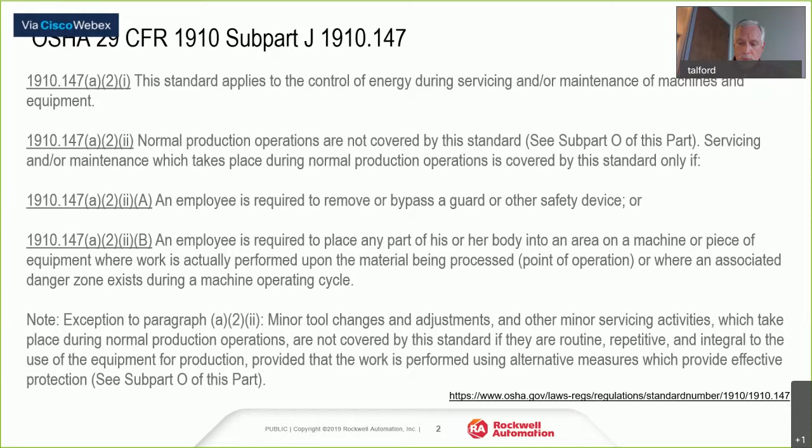But there's a couple of things that are important I want to emphasize here, and one is that this doesn't cover normal production operations. You see there; those are covered by Subpart O. And at the end, there is an exception, note exception paragraph A2 II, that talks about minor tool changes and adjustments. So we'll be digging a little bit deeper into this.

In summary, one thing we want to be very clear about that can get lost in these discussions about the minor or alternative method of protection is that lockout tagout is the default position for servicing and maintenance. Okay, that's it. And personally, I had that driven home by an OSHA field representative, retired several years ago, who was a great mentor. I could sense he sometimes got frustrated with me when I was talking about light curtains and laser scanners and all this stuff. And finally one day he just shut me down.

He said, "Tom, you don't get it. You technologists want to wave your technology wand at everything, and that is not the approach. You've got to earn it." And I'm sitting there, earn it? What do you mean, Jim? He said, "What is the safe state of a machine?" I said, "The safest state is de-energized. But that doesn't do anybody any good." And he goes, "Yeah, that's right. A de-energized machine doesn't have utility, does it?"

I go, "No." And he says, "So what allowance is there?" I'm like, "Okay, Subpart O." And he goes, "That's right, for the point of operation." And he said, start with in mind that the safe state is de-energized, and anything you do, whether it's guarding around the point of operation or minor servicing, make sure you earn it, that you can demonstrate why the approach you're using is necessary, and you can justify it.

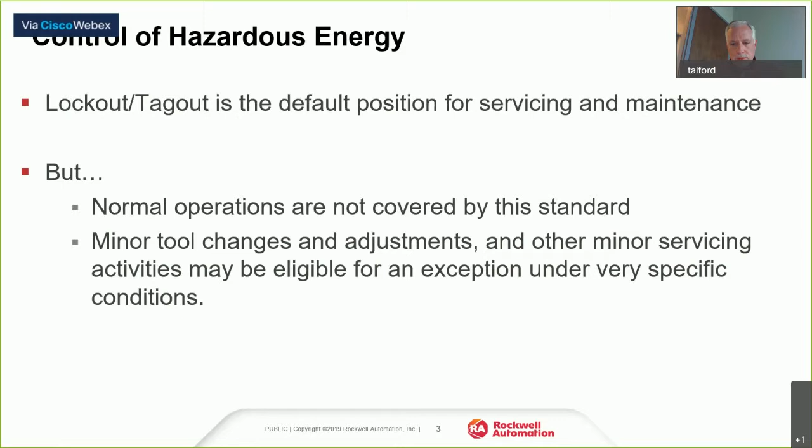So if we dig in a little deeper on the note that I pointed out earlier, you can see that these exceptions for minor servicing have to occur during normal production, be routine, be repetitive, integral to the operation of the machine, and there must be an alternative measure in place that provides effective protection. In order to use the minor servicing exception, as we often call it, we have to meet all of these requirements.

What I see often with minor servicing, I tend to see folks fall into one of two groups. There's the group that doesn't take advantage of it at all. They're scared to death of it, minor servicing invokes fear, and they avoid it. Then unfortunately there's a large group of others that say, oh, minor servicing, I'm going to claim that, with no thought and consideration to the requirements. This exception is detailed, and there's a lot of supporting guidance around what it takes to meet this.

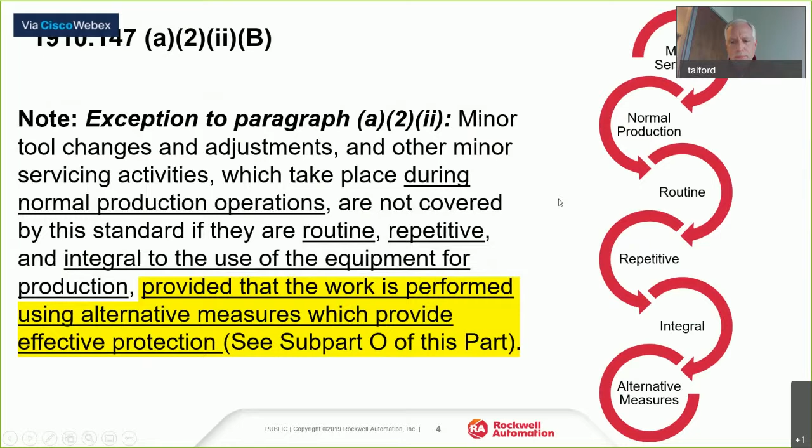So what happens here in minor servicing, we begin to see some overlap of the worlds. There's this case on the left in red where we have lockout tagout, where the machine must be de-energized completely. On the right, we recognize that to perform some tasks, the machine must be energized. There's different criteria. If we're dealing with lockout, tagout, or control of hazardous energy on the left, that's very procedural - you can see the outline of the procedures required. When we get to performing tasks under energy, it's a different realm, and even the note directs us to subpart O.

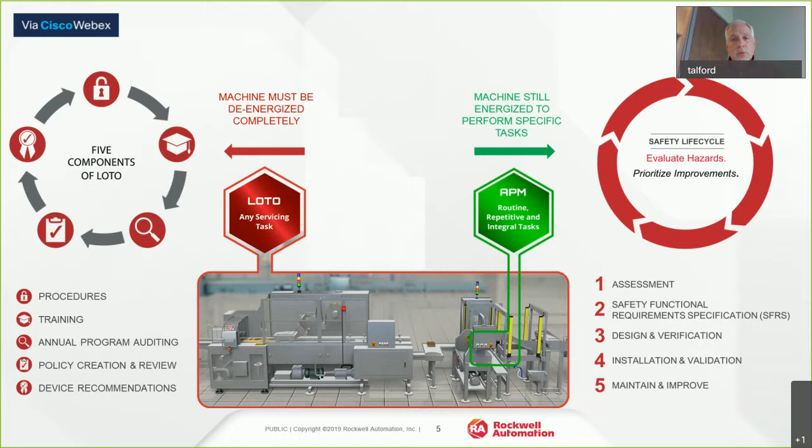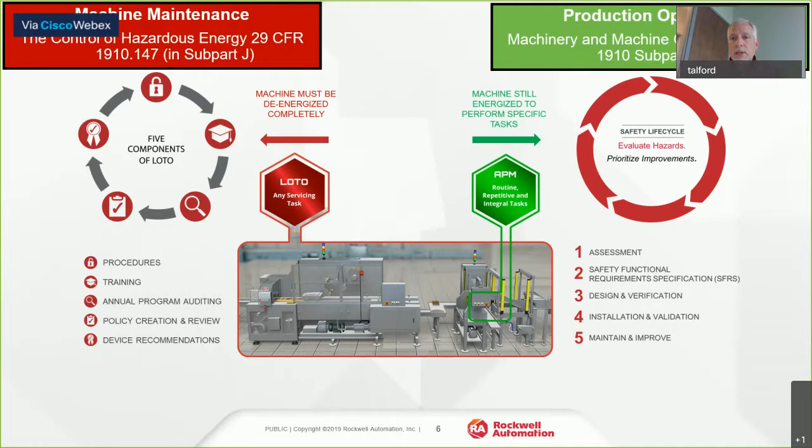So for machine maintenance, that falls under 1910.147, 1910 subpart O for production operation, and then minor servicing bridges and allows for some minor servicing tasks to be performed. But we have to meet criteria, and the key part of that criteria is effective protection. Because quite honestly, if it's routine, repetitive, integral to the operation of the machine, and it's done during normal production, so what if we don't have an effective means of protection?

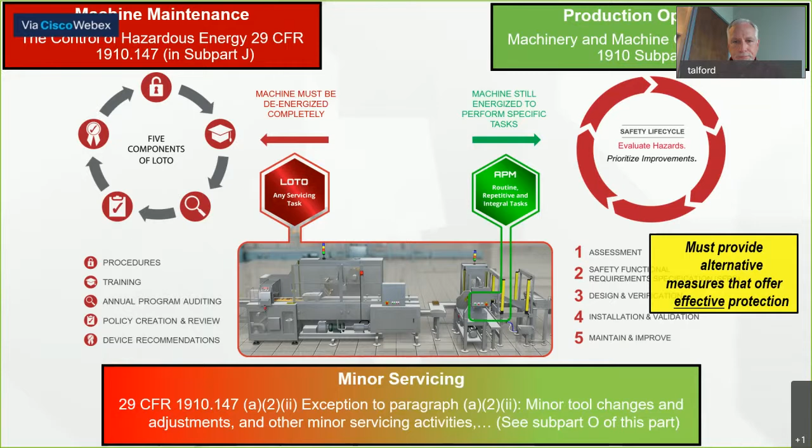This is absolutely the critical piece, and unfortunately the piece that I don't see folks spend enough time looking at. Why do we want to spend time on this? Why is this important? One reason you see commonly is the financial impact. Locking out or tagging out takes time, okay? An alternative measure can reduce that time to perform a task, and that can have significant financial impact. So that's one reason people are concerned.

But other reasons that we want to look at alternative measures is what about other exposures? When I go to a panel and de-energize it, I am introduced to potentially other hazards. So we need to look at the bigger picture. Also, is it potential that the alternative method of protection may actually reduce risk in some area? And we also need to look at the reliability of machinery - what impact is our lockout tagout program having on that? So those are some of the reasons why it's important that we look at this.

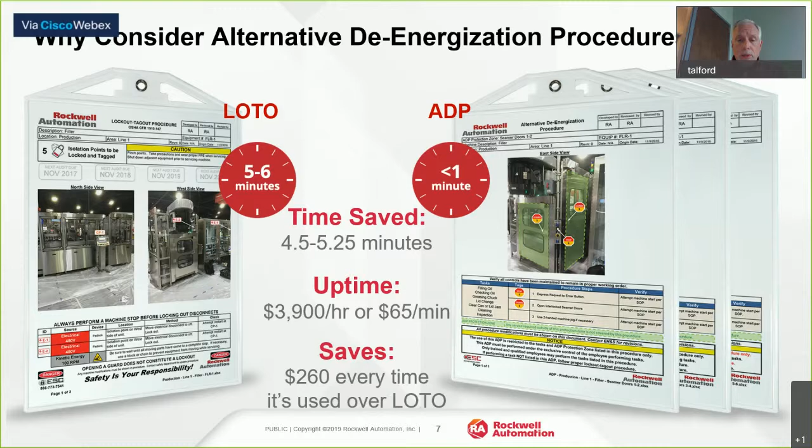Let's clarify, make sure we understand what's the law and what's the standards, because I'll get rattling on and maybe just start spitting out some standards and references. The key thing is federal regulations 29 CFR 1910 - that is the law. That's what we must do. It's a performance standard. It's the law.

There are several industry standards that we will reference, such as ANSI ASSP Z244.1, ANSI B11.0, B11.19. These are industry standards, falling under what's termed consensus standards. They help us with the how, but they're not the law. So if there's ever a conflict between the standard and what you see in 29 CFR 1910, 29 CFR 1910 is the law - it's the top dog, but it doesn't prescribe exactly how we get to this effective protection. That's why these standards become real important. Another type of standard mentioned here are machine specific, or what are called C-level standards.

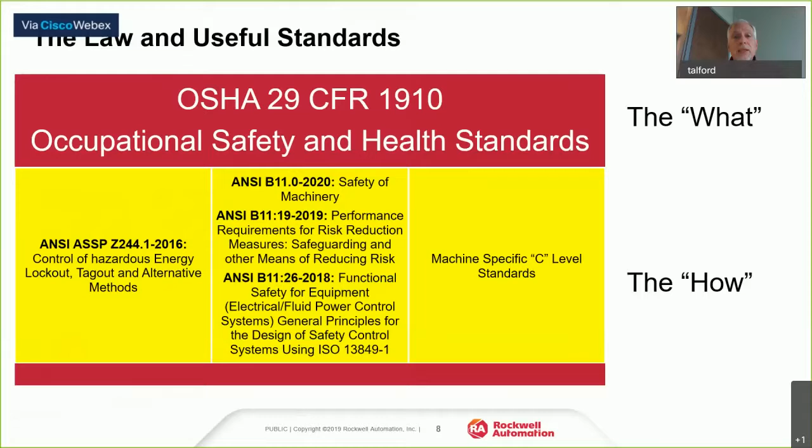So you may find, like for robots, for presses, there are servicing tasks that are well documented in there, how to have an effective alternative means of protection when dealing with that specific kind of machinery. Right?

ANSI Z244.1-2016 really is a great document that I would encourage you, if you're applying or thinking about applying the minor servicing exception, that you invest in getting this document and familiarize yourself with it. It supports everything we're trying to achieve here.

The first 7 sections really focus on the control of hazardous energy and making sure that we're not exposing our workers to any type of unexpected startup, things of that nature, dealing with stored energy. And it states here in 7.1, lockout/tagout shall be used to secure the energy isolating device to control hazardous energy to the machinery, equipment, or process from the energy source. Sorry, I read all that because the key's right here. Lockout shall be the primary method of hazardous energy control.

Okay, that's clear. I said it before. I'll say it again. Sorry, but it's important. We've got to earn it. Think of it that way. I need to justify. I need to demonstrate practicability if I'm going to use the minor servicing.

Now, if we get to alternative methods of hazardous energy control, or what's sometimes referred to as minor servicing, to use those alternative methods, there are 3 criteria that I'm going to point out here. That'll be the basis of most of our time. One, I underlined effective. How do you know if it's effective? Effective means it has to work.

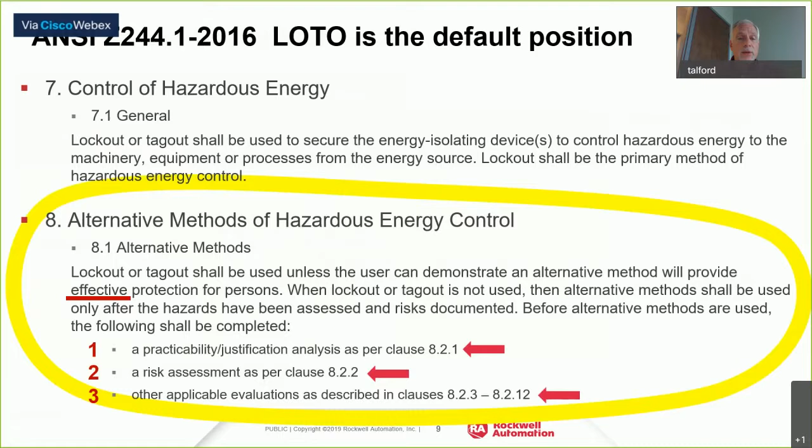There's that guy, man. He's always there when we're talking about guarding and risk management, risk reduction. So the risk assessment, and then we look at the other applicable evaluations that are important for an alternative method. So these are three things. Before I'm going to claim that I have an effective alternative method, I need to make sure that I've looked at all three of these areas. And this standard gives us great guidance for that. So the practicability justification analysis.

I've got them out here. It starts with assess lockout impacts. What are the impacts of locking out? What's the procedure? Are folks exposed potentially to arc flash hazards? Maybe they're not. Maybe the impact is minimal. We need to look at that. We can't justify the use of an alternative method just because the lockout is inconvenient. Okay, so we need to look at the impacts.

Look at the impacts that are financial. Look at the impacts on the reliability of the machinery. Starting and stopping machinery, especially if it's excessive, obviously can damage the equipment, right? So this analysis begins by looking at the impacts. It also then goes down to assessing options for minimizing exposure. So are there ways we could do this differently?

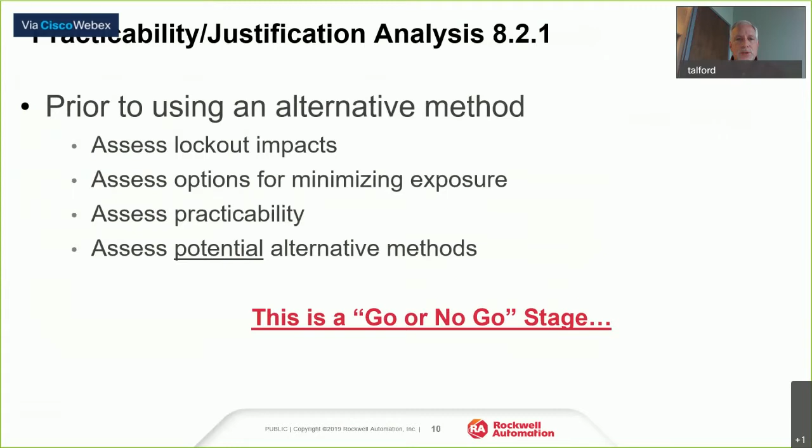The task, and maybe reduce the exposure, and then practicability is looking at the alternative measures and is it feasible? Is lockout feasible? Is it viable? Are alternative methods feasible or viable? You give that consideration. Then look at the potential alternative methods. We haven't gotten to one yet. There's a systematic approach to all this that's really important. And this is kind of a go, no-go stage, as the standard refers to it. It starts with this practicability analysis.

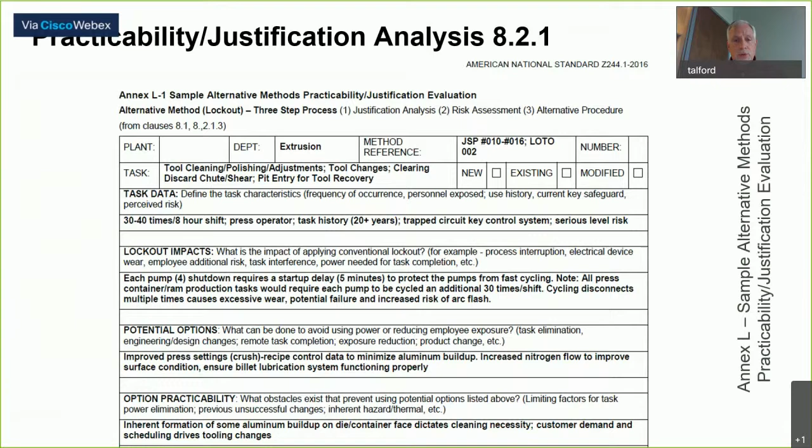So there's wear issues related. You go through and you look at the safety on the equipment, the financial impact, all those areas. And this sheet gives you a nice guidance for that.

After we've looked at the practicability analysis, we've done that, the next is risk assessment. Now, when you apply an alternative method, you'll see that this well-recognized industry standard, ANSI ASSP American Society of Safety Professionals Z244.1, 2016, says an alternative method to lockout or tagout shall be based on a risk assessment that identifies the hazards. So sometimes I still get in discussions with folks, do I need to do a risk assessment? There's only one answer, especially if you're using an alternative method, and it's yes.

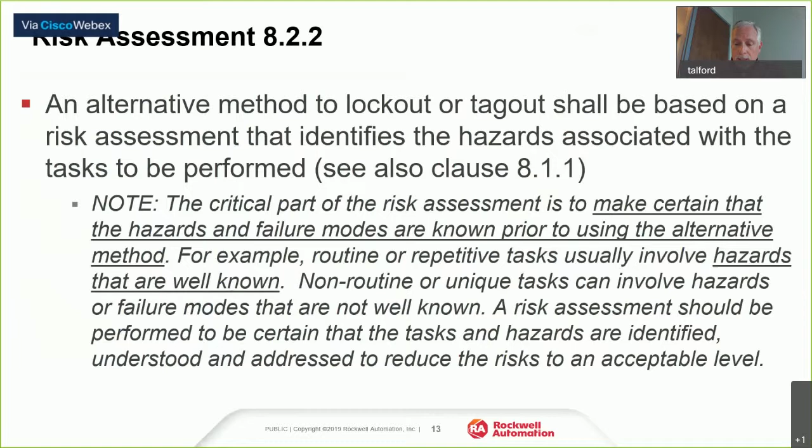Okay, so keep that in mind, and this is really important. You get the team together. Alternative method deals with well-known hazards. Well, one of the benefits of going through a risk assessment is you kind of dig out all the potential hazards, and what you'll find is there may be some that you didn't even recognize before. So this systematic standards-based approach to risk reduction is really important, and it starts with identifying those tasks.

Another thing from the risk assessment to keep in mind is that there are many risk assessment methods and models, and that's okay, choose one. Certain industries, like robotics, if you look at the Robotic Industries Association, they have very nice guidance in their technical report. But what's nice is you can use that model for risk assessment on a lot of different equipment. You just wouldn't use the pieces that are specific to robot application. So don't stress about which model, but choose one and use it consistently.

And they actually called this out, I think this is fair: it's a qualitative estimation. We want to be as quantitative as we can, but the reality is risk assessments, because they involve people, do still have a very high qualitative measure.

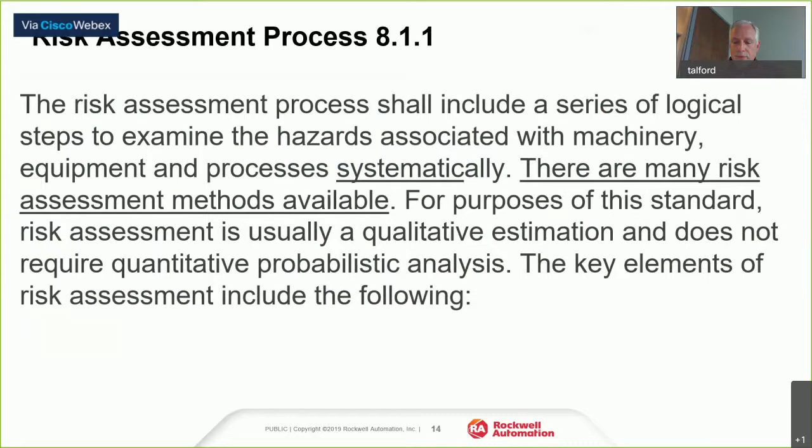So we see here's the risk assessment process. This is very normal. It starts with looking at the machine limits. You identify task hazard pairs. So what you want to look at is performing this task, the operator is exposed to this hazard, and the way a maintenance person may have to interface with a hazard. Look at the task hazard pair.

Then use a risk scoring system, we'll look at one of those in a moment. Use the hierarchy of controls to systematically reduce the level of risk to an acceptable level. And then you assess: is this an acceptable level of risk or not? If you're at an acceptable level of risk, you document, validate your solution, and move on. If not, it's an iterative process. You apply a risk reduction strategy and then put it back through the process.

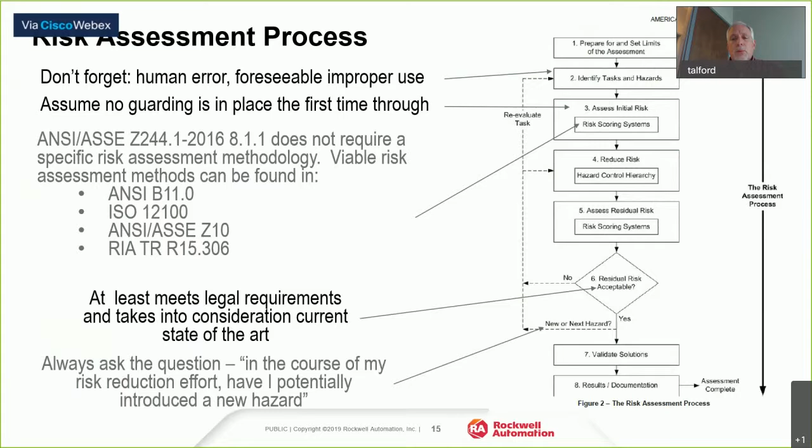A couple other pointers here. Always at the end, ask the question: in the course of my risk reduction effort, have I potentially introduced any new hazards? Especially if you've installed fixed guarding, something like that, you could create a pinch point or something. So here's some guidance, but we could spend all day just on this topic.

Also, the risk scoring system here is a very common one. You see the RIA R15.306. This one provides, like all the models, risk scoring systems, that element of severity and frequency of exposure. So you've got severity and probability, those are the two elements of all risk assessments. And what they do is help you get to quantify, get to the scoring system, so that you can determine whether you have an acceptable level of risk.

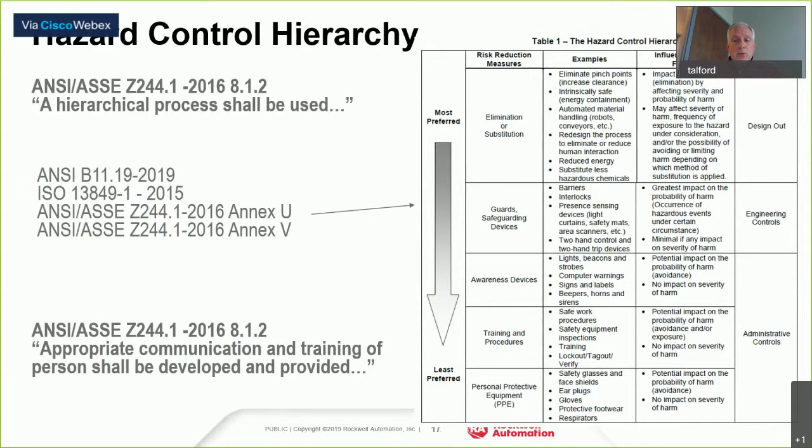Now, if I go back up here, if I've gone through and I do not have an acceptable level of risk, say it's high or very high, I would now use the hierarchy of controls to systematically reduce my risk. First, I'd see, hey, can I eliminate or substitute or design it out? Then I look at guarding, fixed guarding. At each level, I have residual risk that I carry to the next as I go through it. Once I've reduced risk as much as I can through design change, elimination, guarding, and safeguarding, then I look at awareness devices, then training and procedures, and then obviously the lowest level is PPE. But this is a systematic way of getting down to an acceptable level of risk, and it's important that you follow these steps in this order.

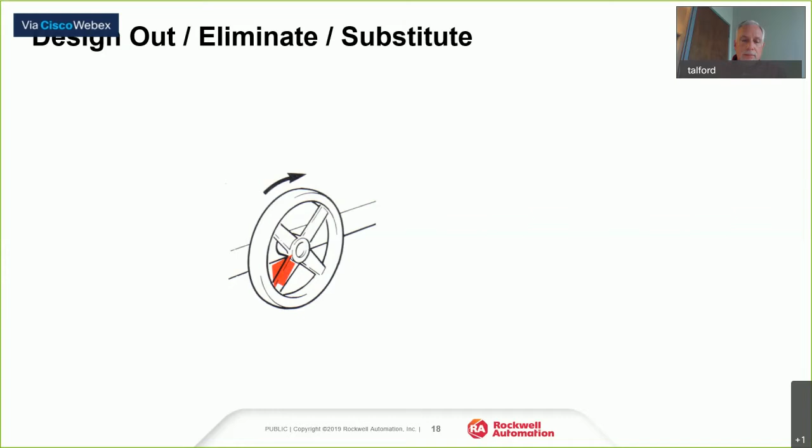Simple example here. Obviously, with that spoked wheel, there could be a pretty serious pinch point there. Simple design help.

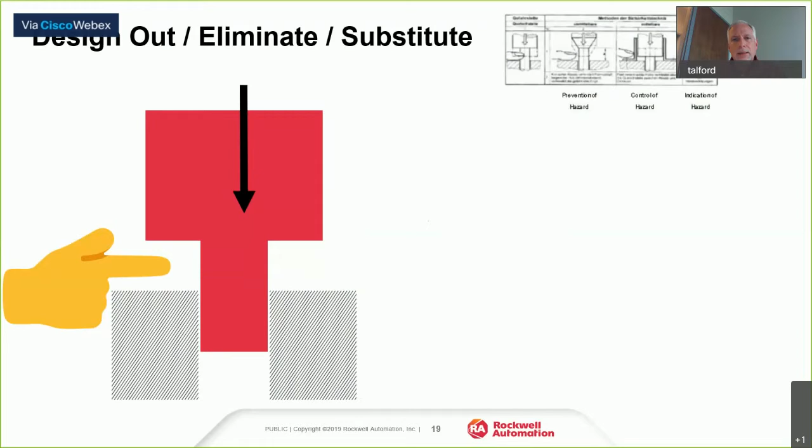Follow it up. Always look and say, is it possible to just design this hazard out completely, eliminate it? There's a lot of different ways.

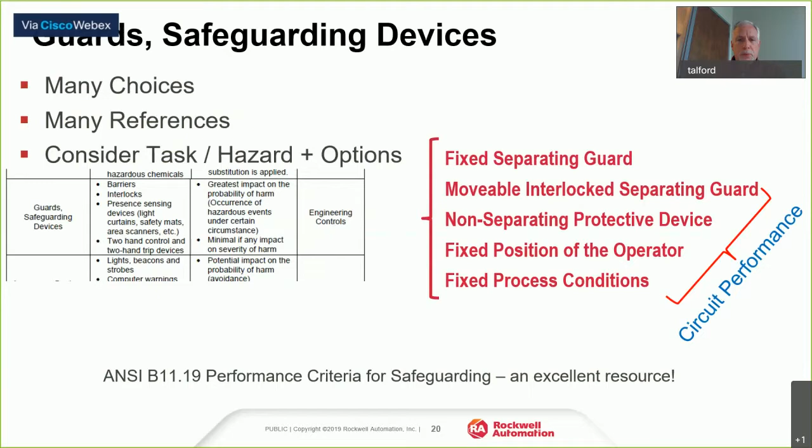Then you get into guards, safeguard devices. You've got fixed guards, movable separating guards, non-separating guards, fixed position, and fixed process.

Fixed guards, pretty straightforward, you see here - practicability. One thing I'll note: when you use fixed guarding, use the auto test. Look around, under, through, over - is it possible to reach the hazard using that auto test?

But it's permanent, it's guarded there. Now, fixed guarding is problematic if I need access. Then I can't be removing guards and use the minor servicing exception.

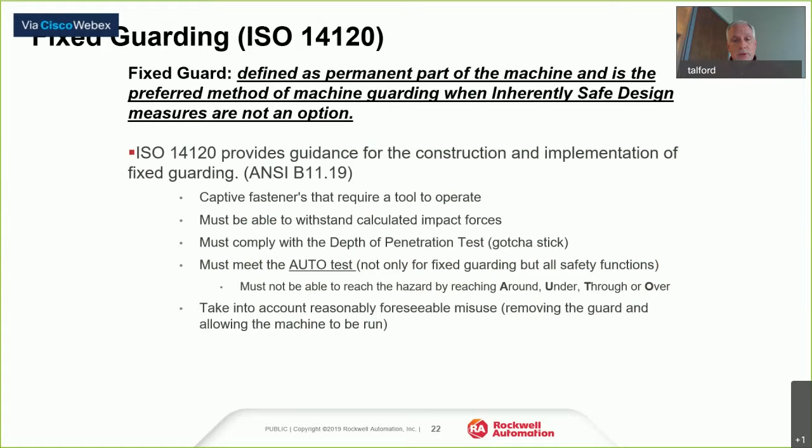Okay, so then we get into movable guards that are separating or non-separating protective devices. See, if you notice here, I achieve the objective. So once I've looked at fixed guards and said no, I need access, well then I look at could that be done with separating guards? It could be, but if the person has something in their hands or they're going in there literally every few seconds, multiple times even, well that's not very practical.

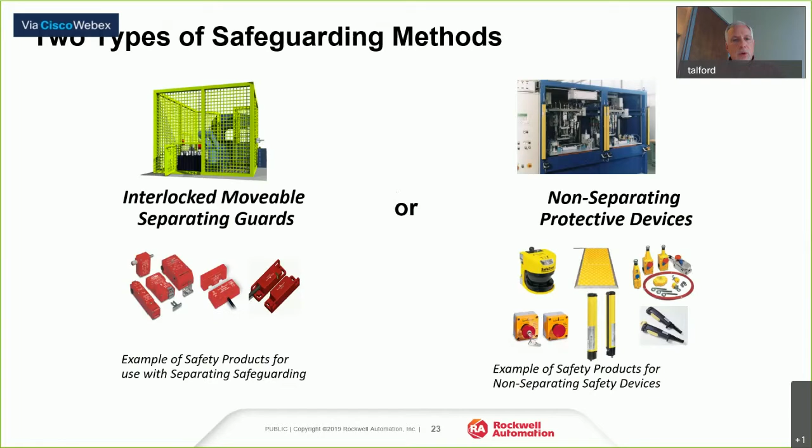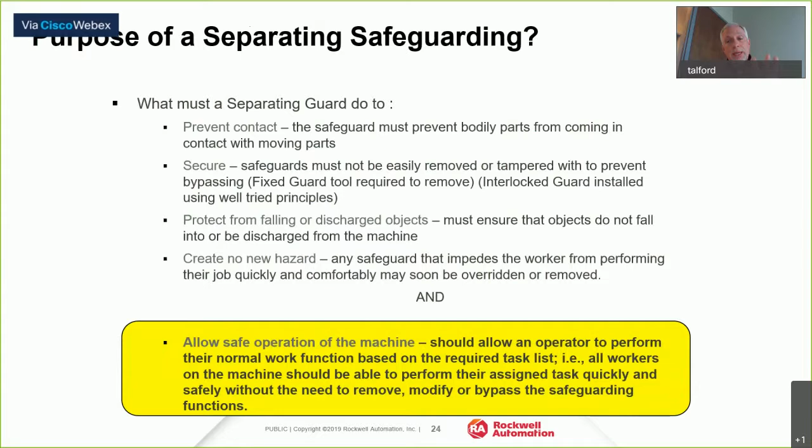And then I'm going to have maintenance issues and things. So then I may need to look at non-separating guards. You systematically go through the process, and separating guards will not only protect those outside the guard from hazards, but they'll also contain the hazard. So it keeps people out, but it also has to keep the hazard in - it has to be able to contain the hazard. So keep that in mind.

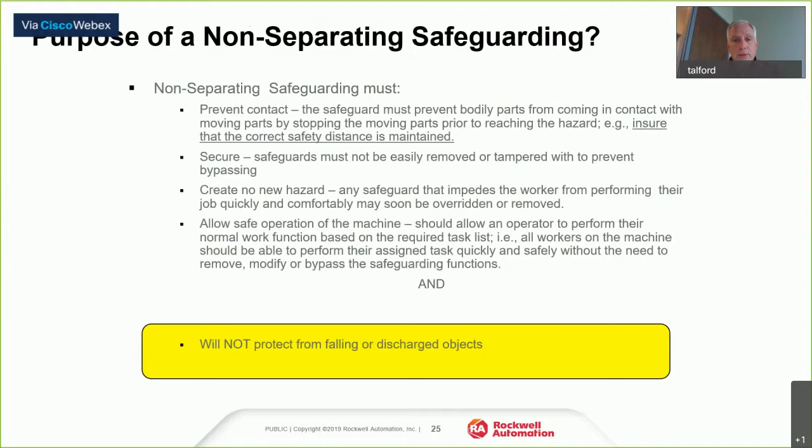Non-separating guards will not protect you from any falling or discharging objects. Pretty obvious, just keep that in mind when you're going through your evaluation. You see here a simple movable guard interlock to prevent access, but here's a presence sensing non-separating strategy.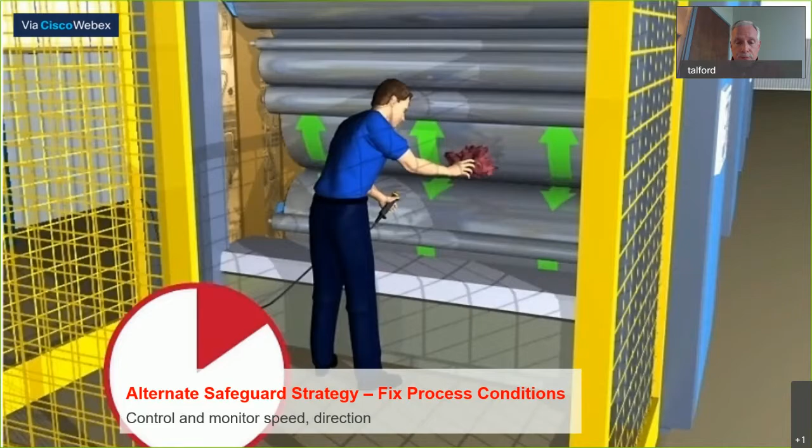So after we've done the practicability and justification analysis and the risk assessment, the alternative methods have to be evaluated. If you look at ANSI Z244.1, don't let this overwhelm you, but it is significant - they've outlined some very important and specific areas that are ways you need to evaluate your alternative method.

One is obviously industry best practices and methods, and you can find those in your C-level standards for the type of machinery you have. They're very, very useful for that.

Architecture and structure - okay, if I have a high level risk and I'm using devices and controls, they will have to be designed in a specific architecture or structure that provides the fault tolerance that I need. The application of well-tried components and well-tried safety principle design.

Evaluating our susceptibility to common cause failure - oh, this is a good one. This one, to me, gets down to just good engineering and good workmanship. Am I using proper spacing in my panels? Do I have control signals and power separated?

Am I using the right kind of current limiting devices? You're saying, well, that's obvious. Well, so many times, it just reinforces that you can buy a lot of the red stuff and put it all together, but if it's not sitting on the right foundation around it, and it's not in the right environment rating and things of that nature, it can all be compromised.

They didn't use "effective," but it's there. So I actually saw that show up in language in a conversation with an OSHA field representative. So when we get to these alternative methods, the circuit performance, this architecture, structure, fault tolerance is really important, and that gets into circuit performance, which is a whole other deep topic. But remember, circuit performance involves the input, logic, and output, all those elements.

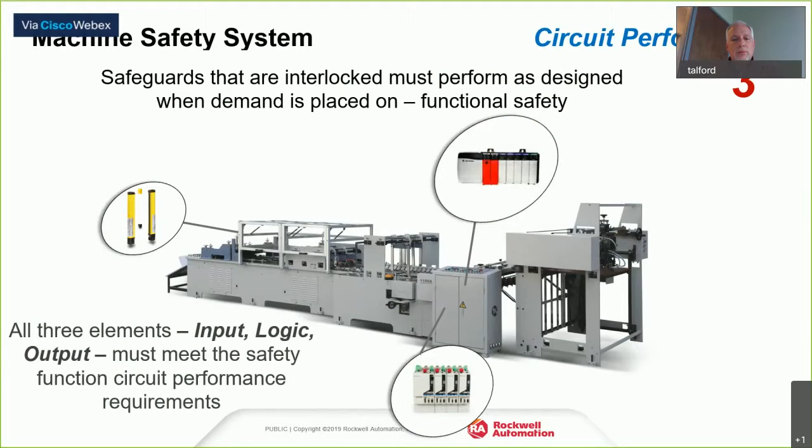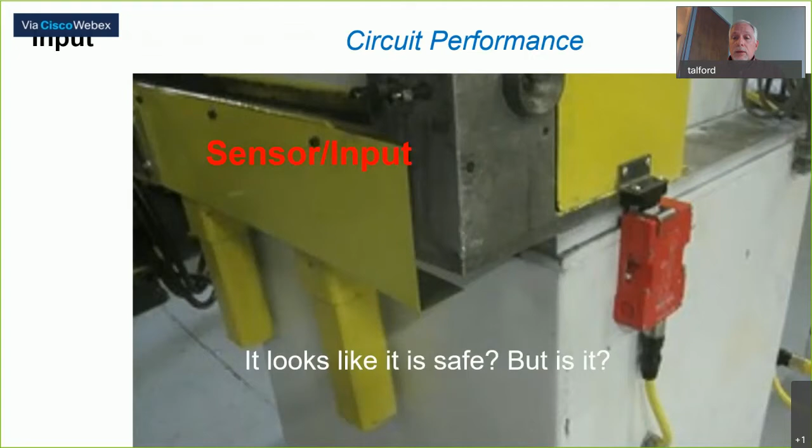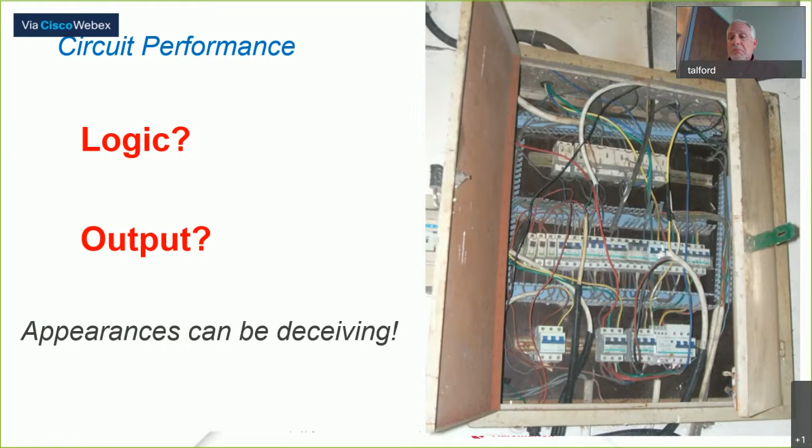Unfortunately, if we look at the panel to which it's wired, no, it's not. There's not a safety rated device in all of that. But what's disturbing is the lack of what I would call workmanship and adherence to NFPA 79, which is your on-machine panel standard, which is a safety standard, by the way, and is important. So even if I have this showing, if this is what's behind it, I've not met the criteria. I'll show this for reference.

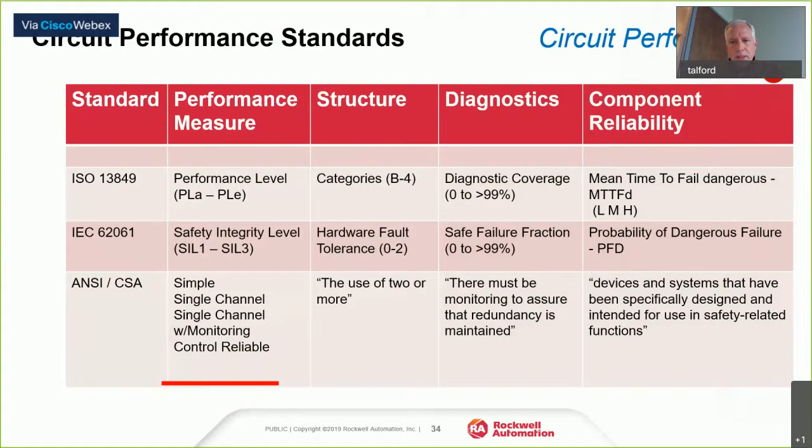When you get into circuit performance, ISO 13849-1 and -2 are really, really helpful and important documents. They provide criteria for circuit performance levels and diagnostic coverage, which are important parts of this. Let's go through a case study here with a printing press. We're doing roll cleaning on a printing press. And what we have here, we've got an in-running nip for roll cleaning.

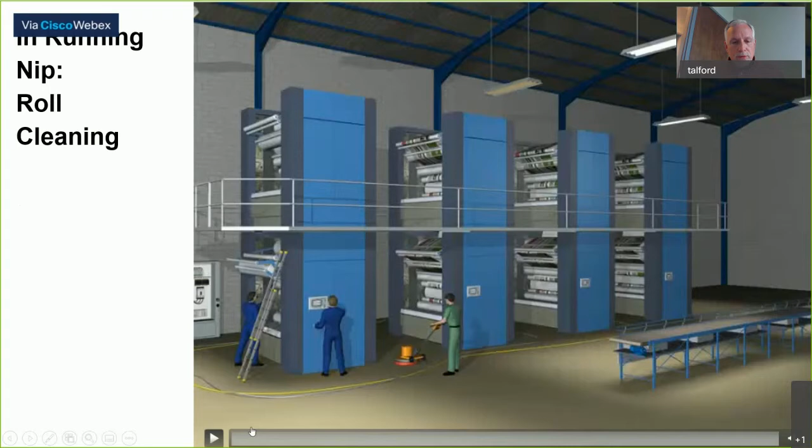Watch here, it's fairly short. You'll probably notice, oh, that panel's wide open. There's lots of issues going on here. Lots of things I don't feel comfortable with. But there's one task I want to really focus in on. And that is the operator on the left that's facing the roll section there on the press, and he's getting ready to perform a roll cleaning task.

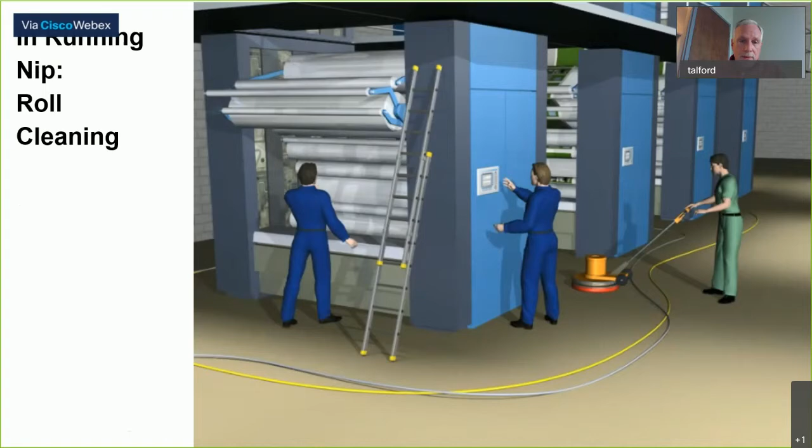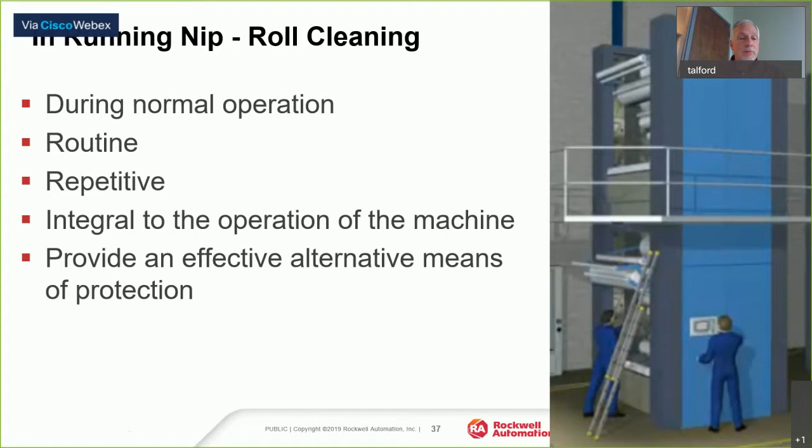Now, could this be covered under the minor servicing exception? Well, it may be, if it's done during normal operation, routine, repetitive, integral to the operation of the machine, and we provided an effective alternative means of protection. We look at the practicability justification analysis. This is a little more specific. Assess the lockout impacts. What's the downtime? Are the lockout tasks so onerous, so complicated that we're really incentivizing people to bypass the procedure? And you know that if it's happening, that's a red flag.

Are we exposing folks to arc flash hazards? And then options for minimizing the exposure. Things like, could we change the press settings? We get build-up on this. Maybe we should use different ink, or maybe change the speed or the pressure between the rolls. You look at everything. Are there other options that would reduce the need to clean the rolls altogether? Could we eliminate that? But unfortunately, when we do the practicability assessment, if you've ever worked in printing, you know that this is inherent to normal press operation.

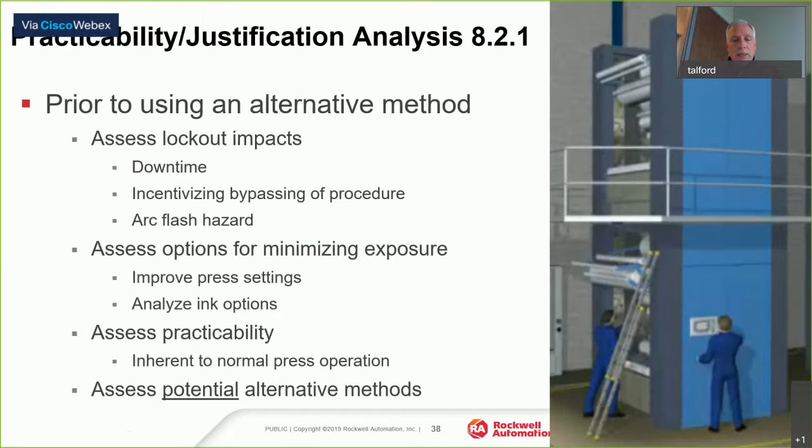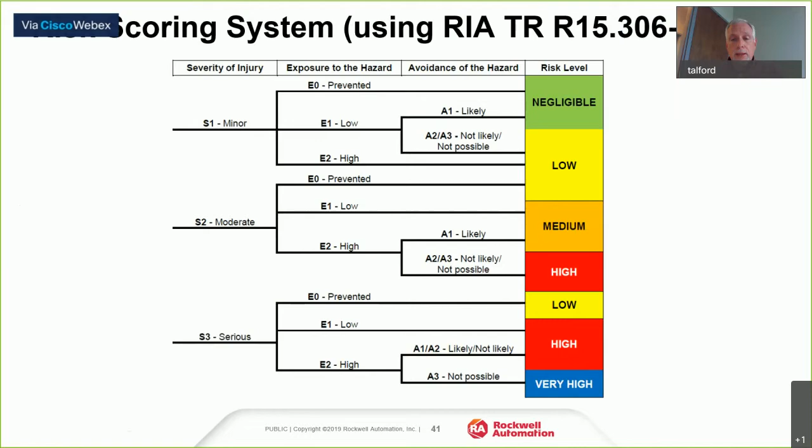So we've gotten through here. We meet all the initial criteria, but we need to look at potential alternative methods. We've done the risk assessment; that's part of looking at alternative methods here. With the task, the rollers are being cleaned during every shift. It's critical to the quality of the product produced. The hazard is an in-running nip. Now, using this risk scoring system, if you come up with anything other than very high, I'm worried, because in-running nips on rolls are very dangerous. So my risk scoring for this would be very high, which is not acceptable.

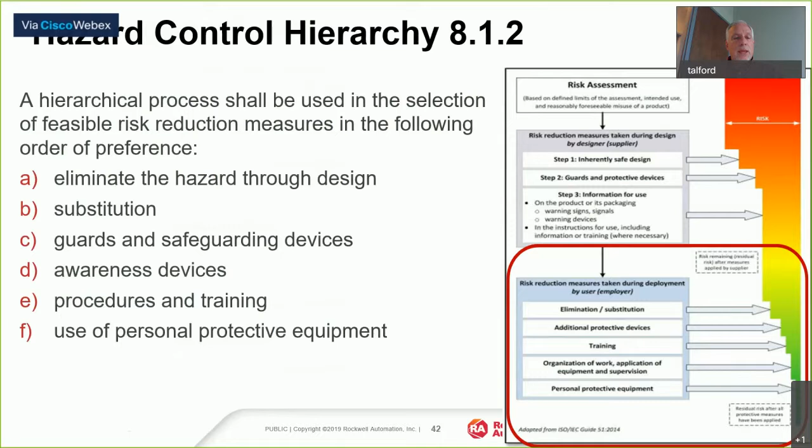Because it's not acceptable, now I need to go through the hierarchy of controls for risk reduction and look at elimination, substitution, all the various options for risk reduction. I do not get to skip from A to F or A to E. I have to start at A and evaluate each one and ensure that I've done everything possible at each level before going to the next. And at the end, make sure I've documented any residual risk that's covered.

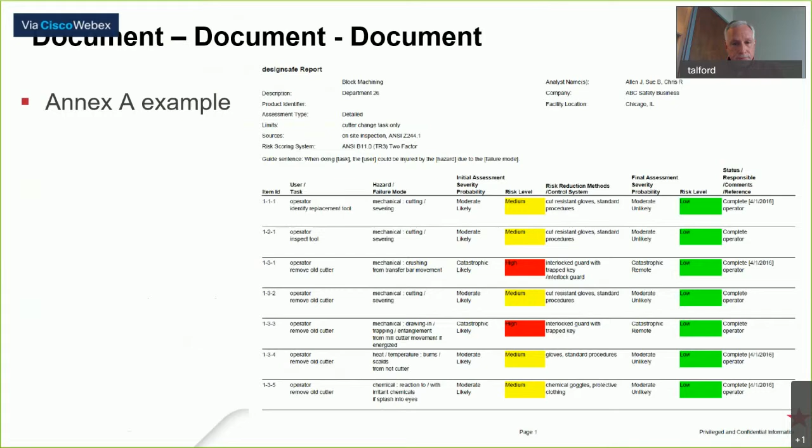So can I eliminate it? Can I make a substitution? Can I limit the interaction? And the reality is no, in this case. Make sure we document. So let's look at fixed guarding as a potential option here.

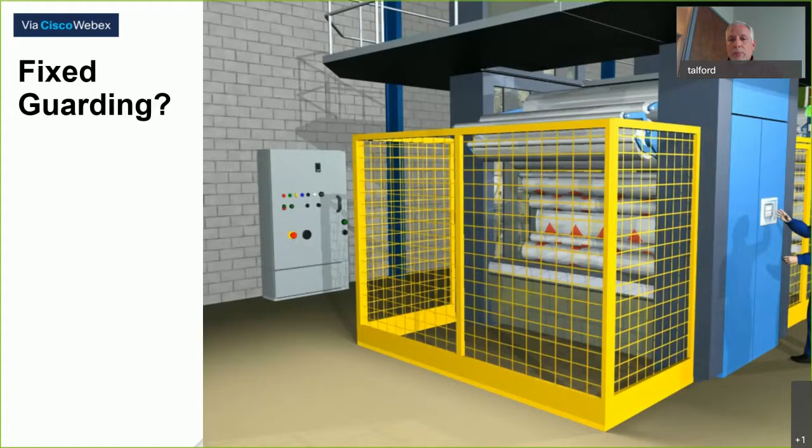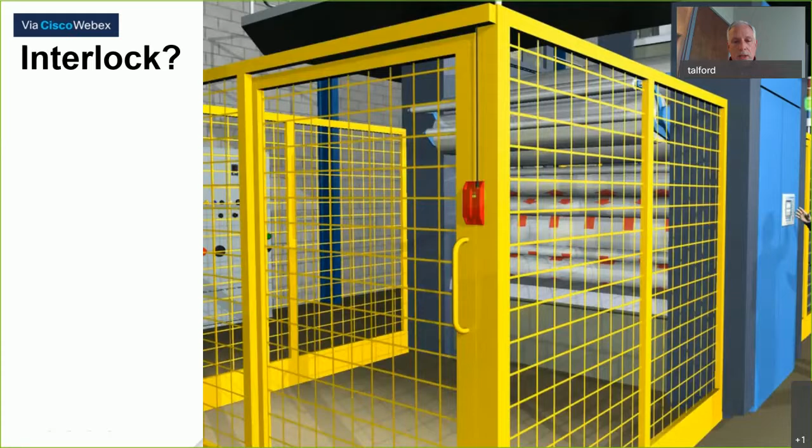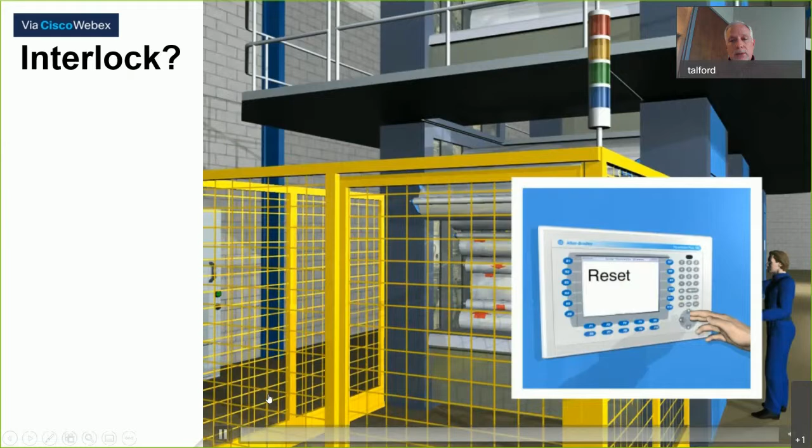Fixed guarding would separate us from that in-running nip, okay? Problem is, we need access. We've already determined that, so it's not a viable option. What about interlock? Well, watch this video here on interlock. This gives us access with a movable guard, but what do you notice once it's open? Yes, the rolls were still turning. The hazard was still present, okay? And that's not going to be acceptable.

What about guard locking, okay? This could be the trick. So now the operator will initiate a request. This one's going to be time-based. There's other techniques where you could feedback from an encoder and things like that. But now we don't have access until the hazardous motion is stopped. Good.

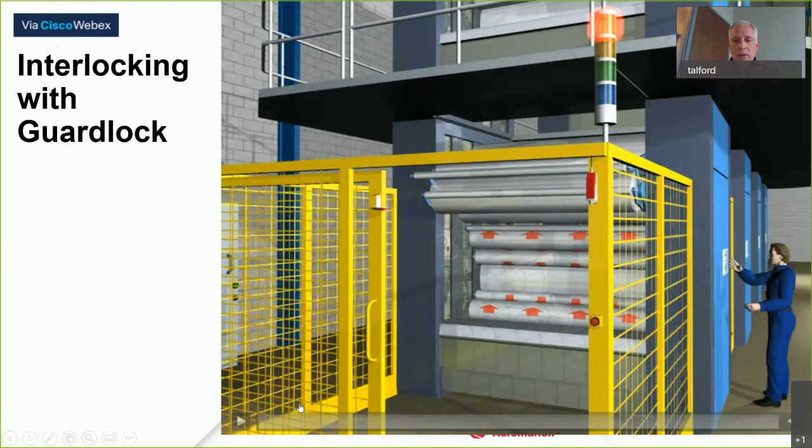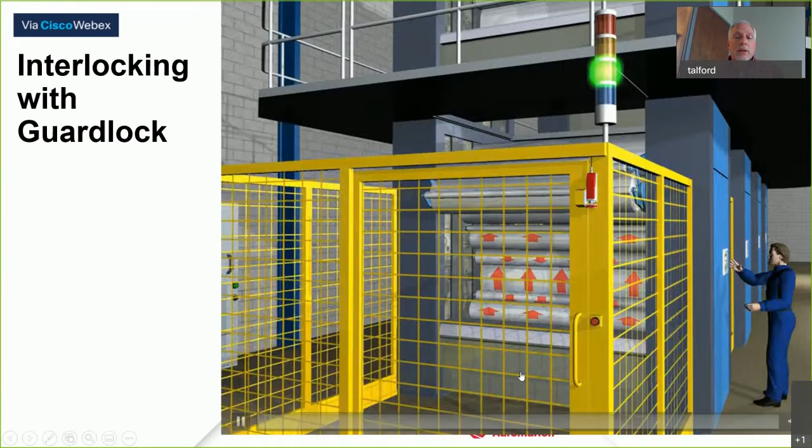But one of the things that concerns me is, see this operator here? Do they have good visibility? If somebody's standing over on this side, I personally would not be comfortable with this, because the way the operator is interfacing the machine here, this is not sufficient. I don't feel that the person going in there would have adequate control. You can see here they could restart the machine.

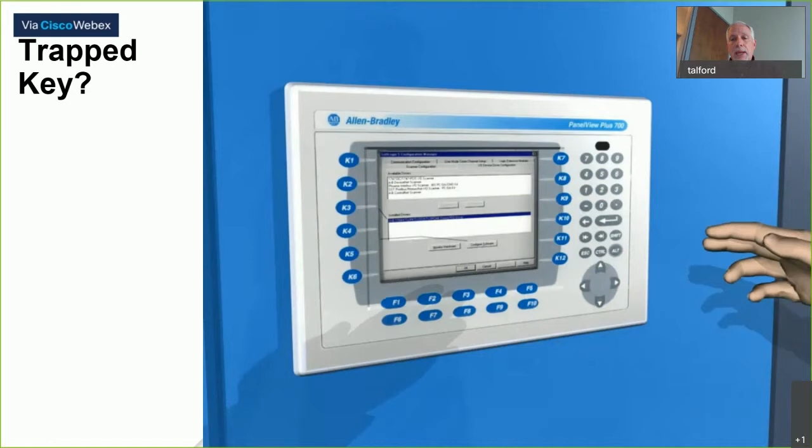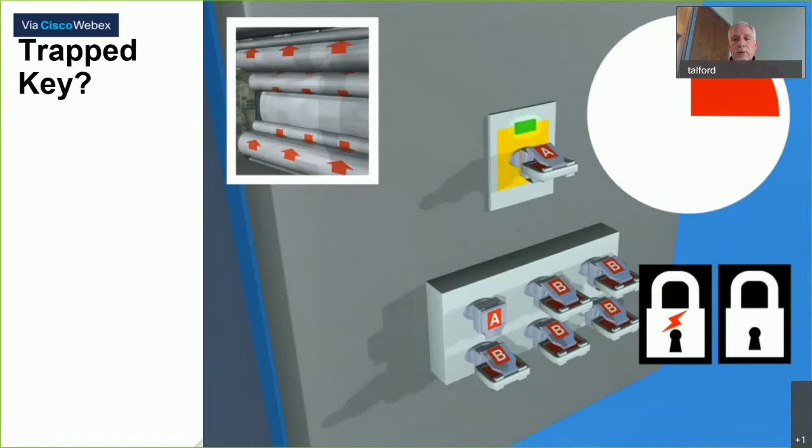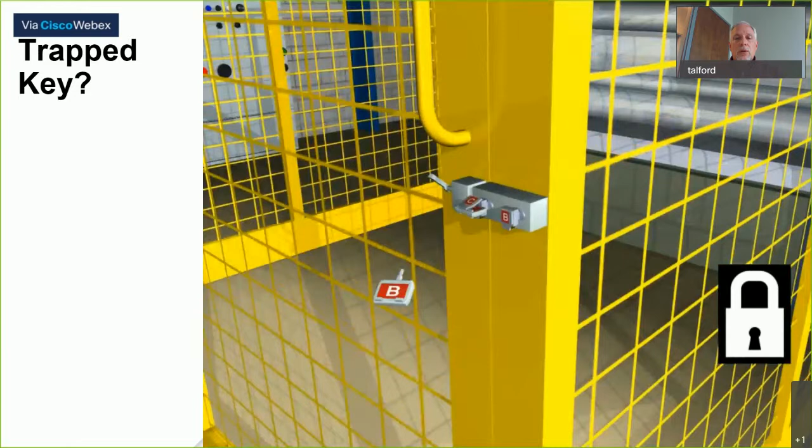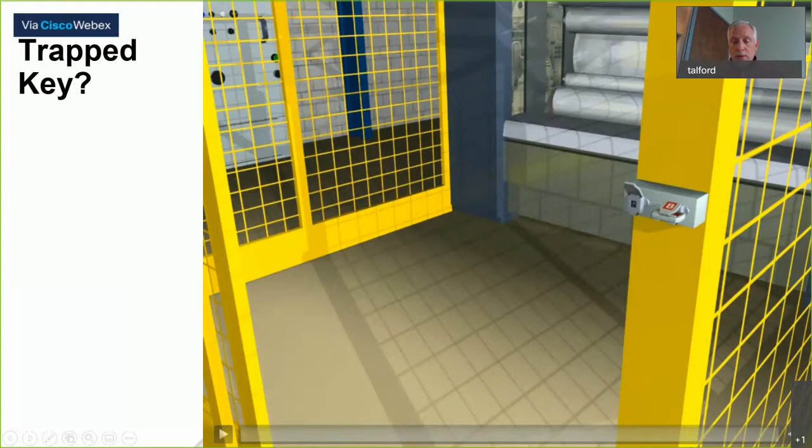What about trapped key? Now we're giving somebody exclusive control. Request is made. Motion stops. Trapped key allows us to release personnel keys. And now, while the person performing the cleaning task is inside there, they have the key with them. So it'd be impossible to restart that machine or have an unexpected startup with this scenario, as long as we've met all the other criteria for the circuit performance.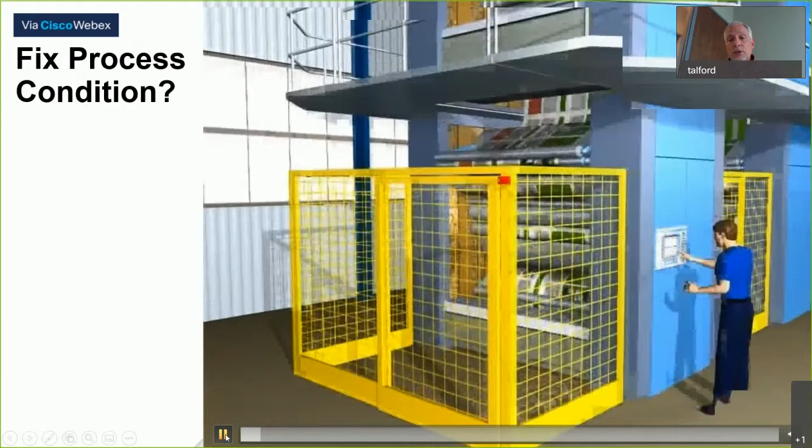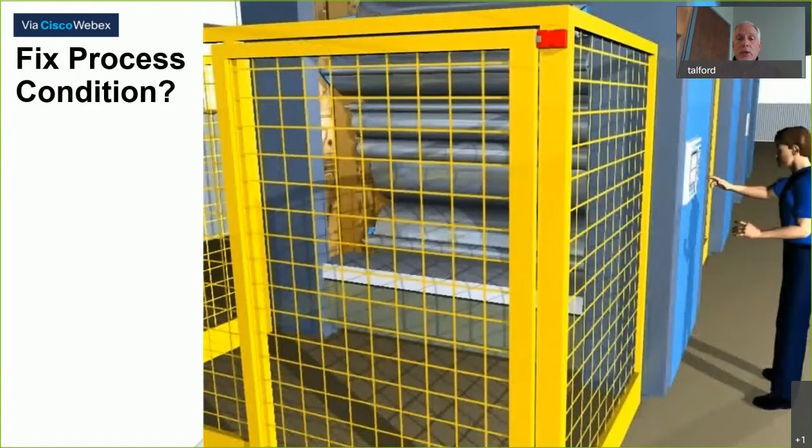The other way, we talked about fixed process condition. Now, fixed process condition is where technology is really helping us. You can see here we're making the request, but now we're going to affect the speed and direction of the rolls. So now, before access is permitted, the rolls are reversed, which helps make the task go by faster. The speed is reduced. And now, upon exit, they can start the machine.

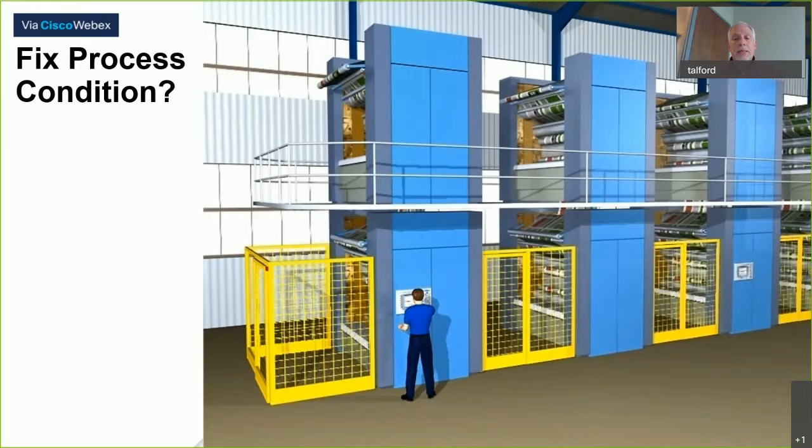So generally, you need to look at all the options. A lot of times, you come up with a combination. You may feel most comfortable with a fixed process condition and a trapped key. It's not uncommon to see them put together. We just want to get you to think here about those. So fixed process condition involves an entire system, as you can see here.

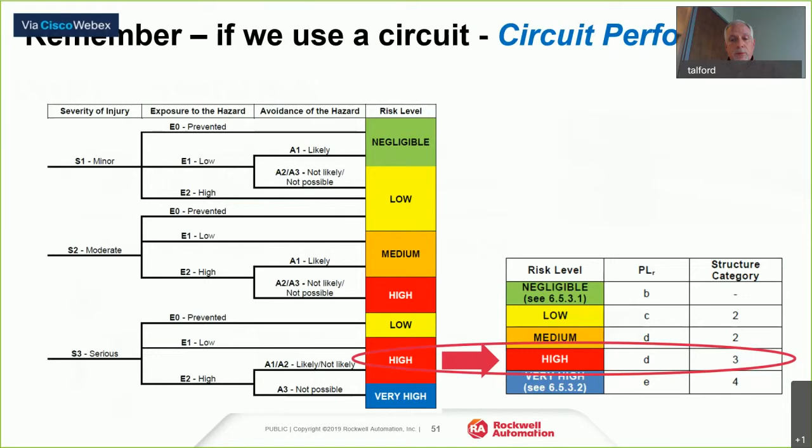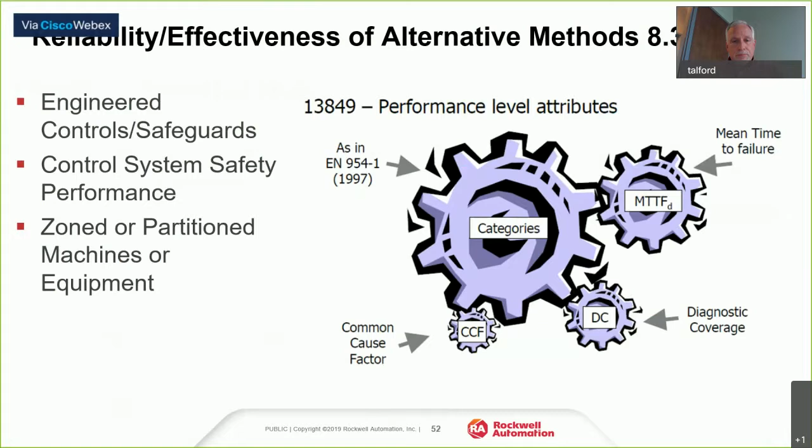Remember, if we use a circuit, the risk assessment is going to tell us what that circuit performance must be. It's not an effective measure if we don't design a system that meets that circuit performance requirement that'll be driven out of the risk assessment. This is absolutely critical. And so you can look at the alternative methods. Once again, ANSI is a reference here.

And from our earlier example, are we justified in the minor service exception? Given the technology that we saw, I believe we could design a combination of measures that would be effective in this situation, a combination of guarding. So I've got fixed guarding on the sides, but I've got a point of movable guard access. And then I could use a personnel key, like a trapped key, along with fixed process conditions, to come up with an effective measure and be able to justify it.

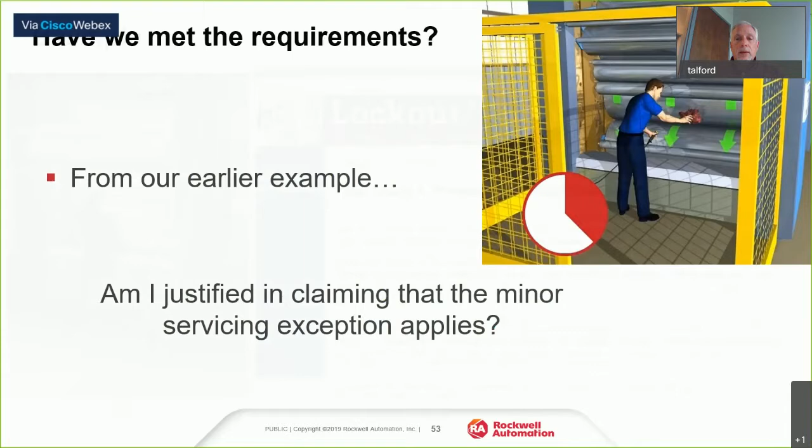Now, for the sake of time, I'm going to summarize what's here, but this comes right out of some of the OSHA training. And if you haven't used the OSHA resources for lockout or tagout training, man, they've got some awesome stuff out there that I reference all the time. And it doesn't cost anything.

But in this case here, we have a situation where the printing press roll has to be cleaned. As we read through this, we see there's a hazard. There's an ingoing nip. And we can see what the company decides. The printing press is energized and its rollers continue to spin at a very high speed. In order for employees to clean the rollers, they must bypass, ding, ding, ding. You see that word, bypass? That should be an alarm or a red flag.

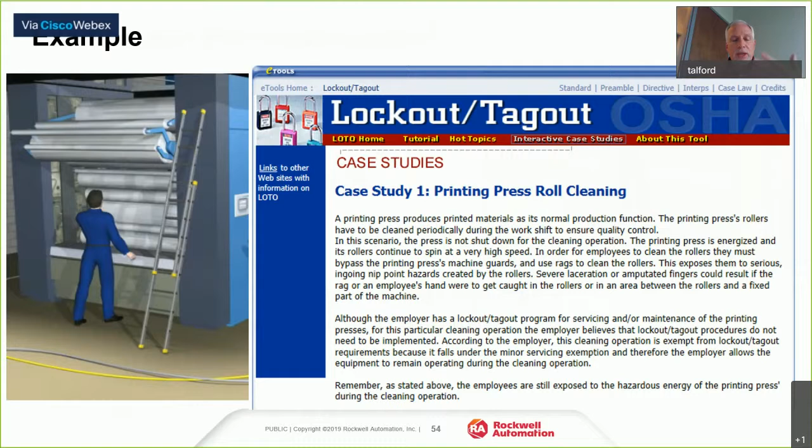The printing press's machine guards and use rags to clean the rollers. This exposes them to serious ingoing nip hazards created by the rollers. Although the employer has a lockout tagout program for servicing or maintenance of the printing press, for this particular cleaning operation the employer believes that lockout or tagout procedures do not need to be implemented. Pretty common scenario there. They've looked at normal production, routine, repetitive, integral to the operation. Alternative measure, we'll see. So is the printing press roll cleaning activity covered by the lockout tagout standard? And the answer is yes.

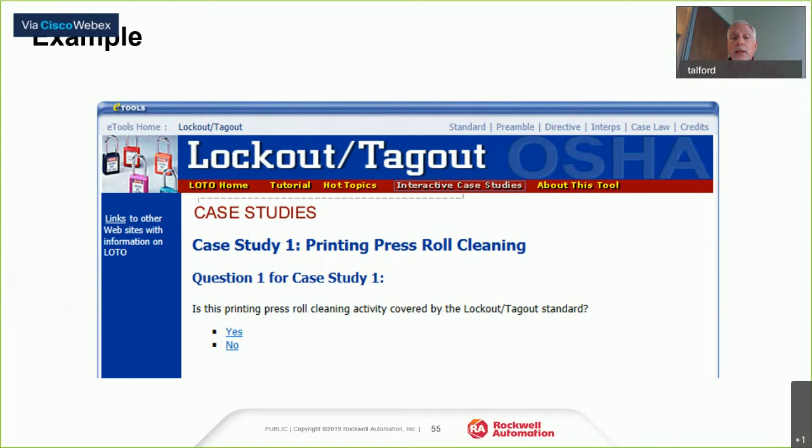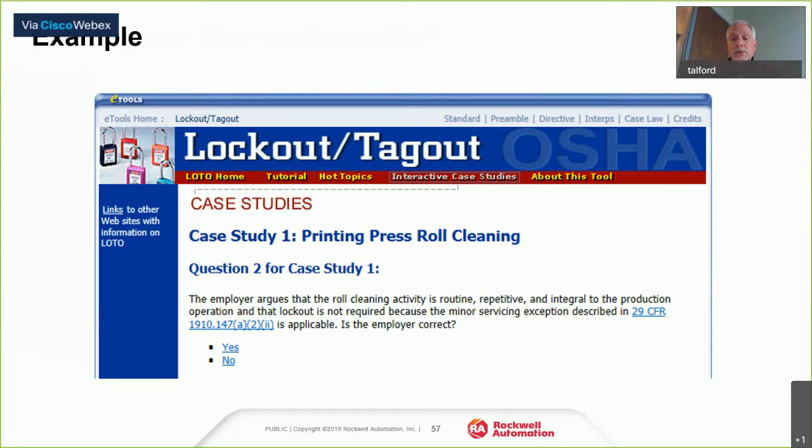And it tells you why. Well, even though the roll activity takes place during normal operation, as we see through here, you'll find that the employee is placing their body into a point of operation associated with a danger zone. The employer argues that the roll cleaning activities are routine, repetitive, and integral to the production operation, that lockout is not required because the minor servicing exception applies, and that 147 is applicable.

Is the employer correct? The answer is no. Why are they not correct? Well, the reason they're not correct is summarized here. They've not provided or implemented an alternative measure, an effective alternative measure of protection for the task. And they are bypassing; you see they bypass the machine. Bypass is no. So if you're bypassing, you're doing something wrong in this regard.

So, but I point out here what's in red. In summary, for the minor servicing exception to apply, each and every element of the exception must be met. All elements. It's an all or none proposition. In this case, the work is not performed using alternative measures that provide effective employee protection.

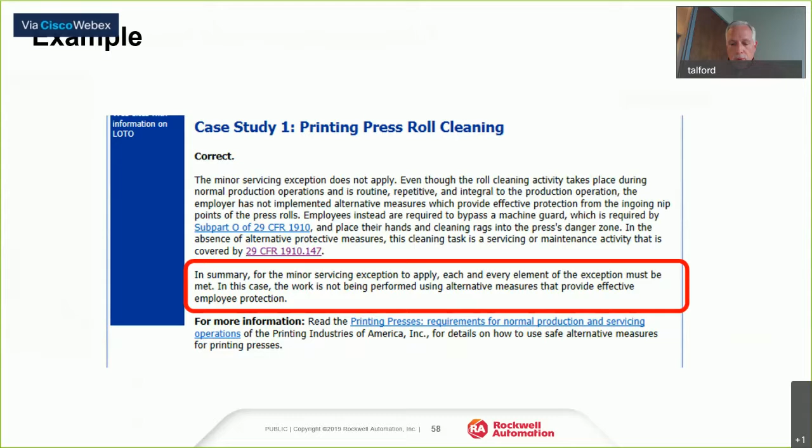And unfortunately, what I've seen way too often is folks get the normal production, routine, repetitive, integral to the operation machine, and placing a light curtain is an alternative method that's effective. No, you don't get to jump to there. There's a means, using guidance from Subpart O, from industry standards like ASSP Z244.1, that help you derive and determine that you have developed an effective alternative means or method of protection.

Finally here, I want to make sure I touch on this: change management is very, very important. Your safety functions need to be protected. Hopefully your organization has an approach for change management, but especially when it involves any pieces of safeguarding or a safety function, you've got to do the reviews.

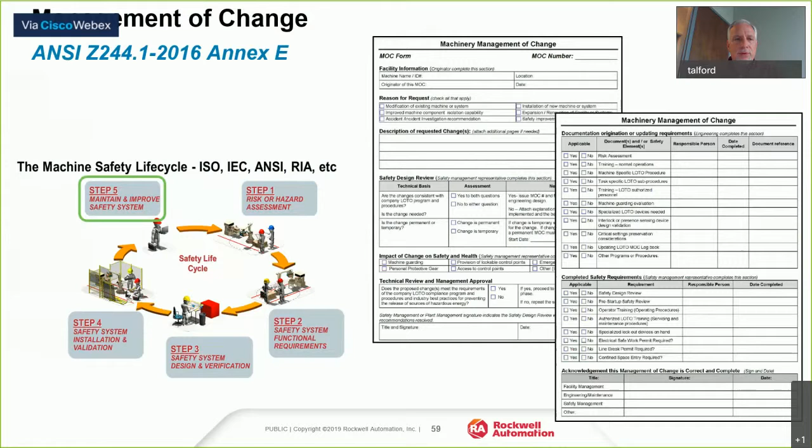It's absolutely critical because in one moment, it can all be unraveled because someone thought, well, this is a drop-in replacement for that, and they didn't evaluate all the specifications carefully. Things of that nature. So it's real key, to preserve everything that you're doing in this area, that you have an effective change management program supporting it.

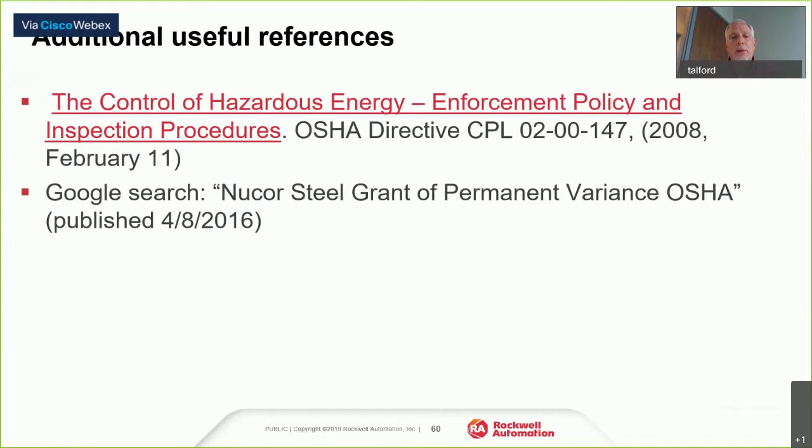So a couple additional useful references. Go out to Google and Google OSHA Directive CPL 02. You don't even need the rest in there. You'll find some really good policy information. And then a really informative permanent variance document is the Nucor Steel Grant of a Permanent Variance by OSHA, and you can Google search that and find a lot of good information on there.